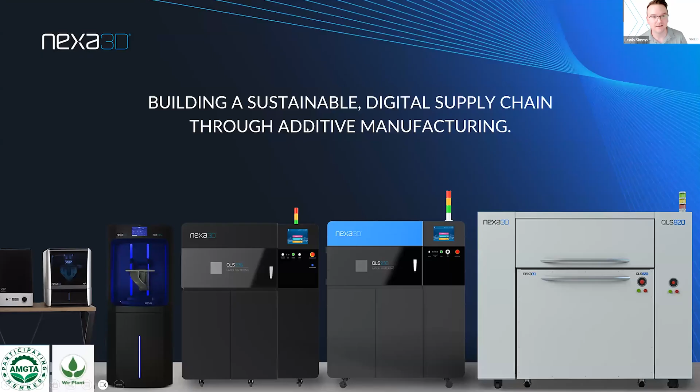But what brings us to work every day, and certainly an exciting component of the TPC conversation today, is building a sustainable digital supply chain through additive manufacturing. It's something that we're all passionate about here at Nexa, and it's something that we keep in mind as we look at both material validations as well as our technology and what we can do with it.

So I will be finishing up my portion of the speaking today. I want to quickly introduce our speakers. We have John Calhoun, who's our director of QLS Business. John has been in the industry for a number of years and brings a lot of expertise regarding powder bed fusion technologies, and certainly on the material side - that's where a lot of my experience comes in as well. And I don't think we have been more excited about an elastomeric material, John, until we found TPC.

So you'll see, hopefully our enthusiasm is conveyed throughout the presentation today. And joining us as well is Dwayne from La La Land Design and Production House. Dwayne comes to us with a ton of experience in leveraging design for the footwear industry, as well as some other products. He has had hands-on experience with TPC. He's been in the mud with us, really learning how to leverage this material to the best of its ability, and really shaping that conversation I talked about a moment ago, which was how can you leverage design to affect the performance of this material?

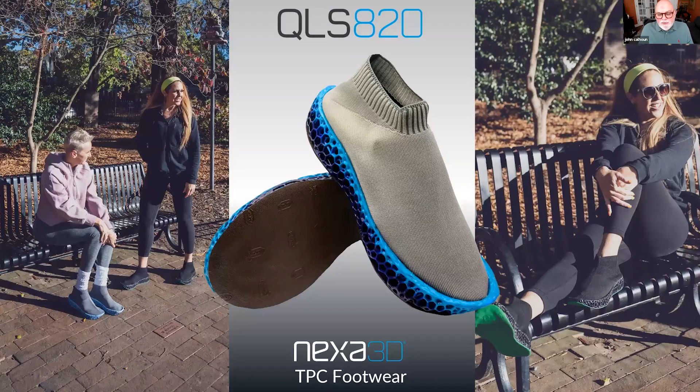So here today, we're going to focus primarily on TPC for the footwear industry. However, this material is so robust and so unique that there are many different industries that can utilize a robust elastomeric material with these type of mechanical properties, which we just haven't seen in the industry.

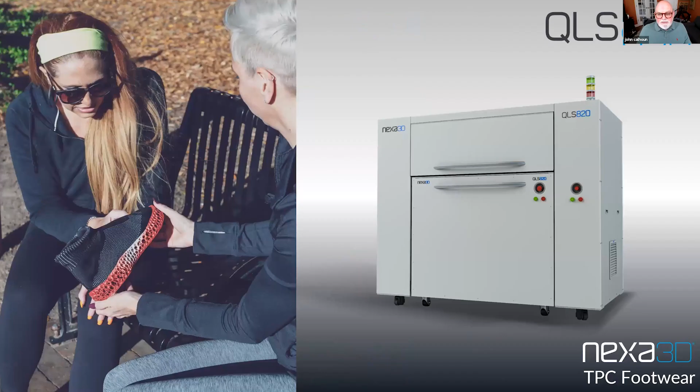Nexa 3D offers a high build volume, high speed SLS printer, the QLS 820, for the production side of this. We also offer the smaller QLS 230 and 260 for doing smaller pieces, maybe something smaller than midsoles or other sportswear parts.

One thing I want to focus on here is there's a lot made of Shore A durometers of materials, and I think it's important to understand a change happening in the industry as people start to understand how meshing your geometry can affect the net shore rating of a material.

While TPC has a Shore A of 95, it's so durable it will allow you to generate a mesh like I have on screen here with a 1 millimeter strut diameter that gives you a net shore rating in the 40s.

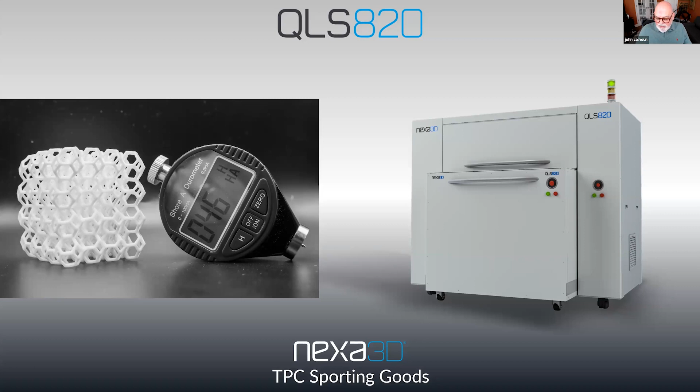So these things kind of work hand in hand. If you want a soft, pliable, low shore material via mesh, it also has to have the resiliency, the toughness, and the rebound to stay together and stay in one piece as you flex that mesh to give you the low shore rating. And TPC certainly excels at that.

And that can be seen in footwear, orthotics, prosthesis, and other applications as well. But today, again, we'll focus on TPC and sporting goods.

Those of you lucky enough to join us at FormNext got a chance to see these shoes that we made in conjunction with our partners, which we'll talk about later in this presentation. This was just an idea we had at Nexa to put together a great example for TPC, and we were able to complete this entire project and make about 10 sets of shoes in under 3 weeks.

I think that's absolutely unprecedented, certainly if you think about what goes into making footwear with traditional manufacturing, molding of EVA foams and things like that. But if you just think about shoes, there's tons of components that go into shoes, and many of these would be excellent applications for TPC based on its durability, its low cost of manufacturing, and customization across many sizes.

The thing that gets lost on people sometimes is you think about making shoes, well, it's not just making one style, it's making 22 sizes or more of a shoe in men's and women's, and then all of these internal components. That's a lot of tooling required to make a line of shoes.

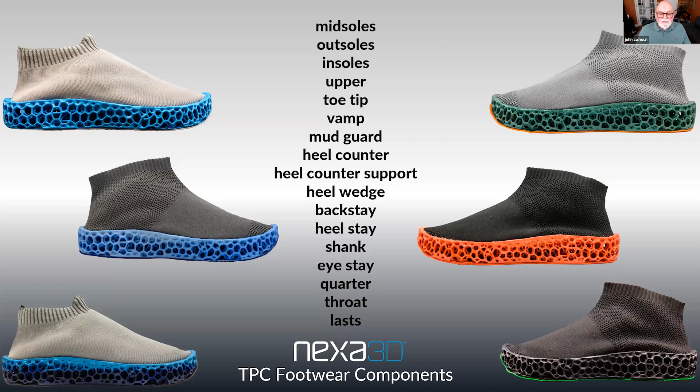What we're bringing to the industry with materials like TPC is now the ability to do customized pieces and customized shoes on demand, which is really unprecedented. That really just comes down to having the right elastomeric material with the right durability, the right softness, the right capability on the print side that would allow you to get into colors and dyeing and all of these things we'll talk about today.

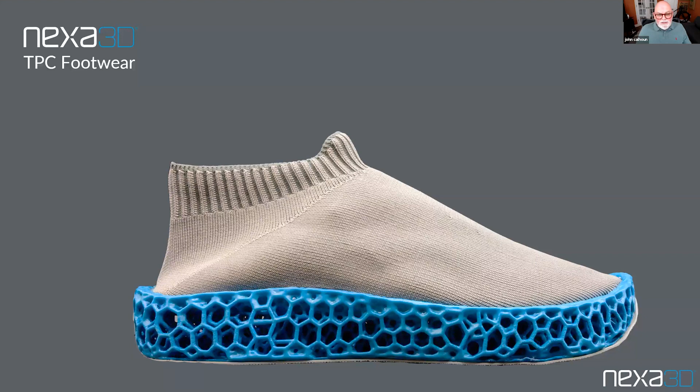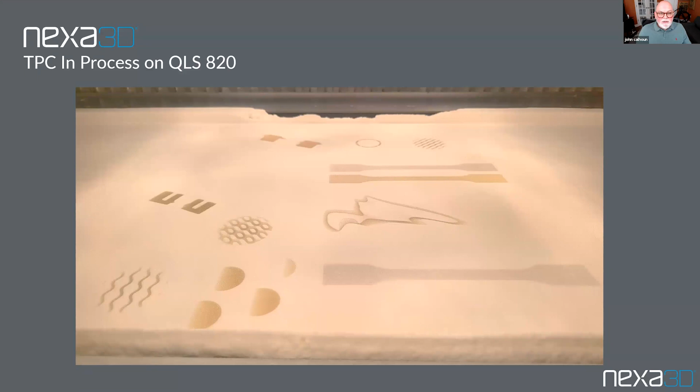So again, you can see the piece of the midsole we produced with TPC for FormNext. What you can see on the slide now is the actual 820 running a whole range of parts in TPC. You'll notice this material is white. When the parts are finished, they are bright white, and that allows us to dye the parts any color.

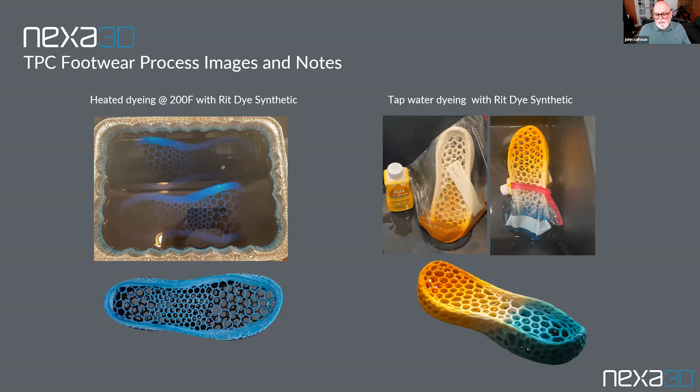So you can go as far as you want with automation, which we'll talk about, or you can do it as minimal as your budget will allow.

At the production stage, clearly the 820 with its 4 laser system and the ability to turn over its build volume multiple times in a 24-hour period lends itself to automated production. The post-pro DP will allow for automated depowdering, and then of course the post-pro SF100 will allow for vapor smoothing of these parts.

If that's your intended desire for the finished goods of a vapor smooth part, you can certainly do it. One interesting thing is that with TPC, when you get into fine strut diameters and things that need to flex and rebound, vapor smoothing can actually help the durability of these parts by smoothing out surface imperfections that could be the start of a surface crack or lead to failure. So combining TPC, a highly durable material, with vapor smoothing refines it even further, giving you a product with great durability, great longevity, and an incredibly smooth surface finish that feels good in contact with skin in prosthesis applications.

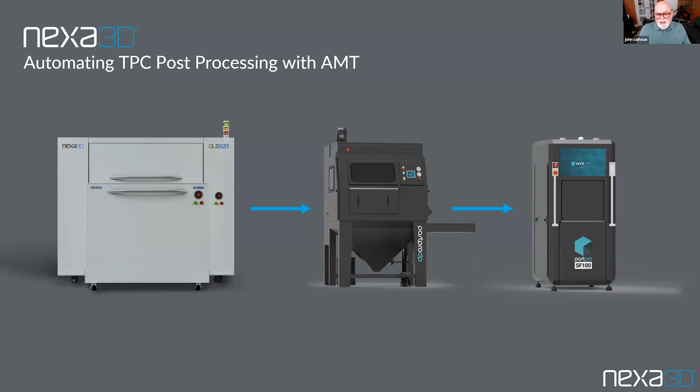It's a fantastic application. So just a couple of notes from our project: we did a super light midsole that only weighed 145 grams. If you compare that to a resin-based midsole from Carbon, their midsole weighed 350 grams. So from a competitive standpoint, it's amazing that we're less than half the weight of Carbon, which also translates to less than half the cost for production.

There are also much easier things on the finishing side which aren't as obvious. For instance, you can use automated depowdering with our systems and recover all that powder. With resin-based systems, that middle step of cleaning resin off your parts is painful at times, wasteful, and generates hazardous waste. When you get into fine meshing, the complexity of cleaning really rises. Not so with powder-based parts—with automated cleaning, you can simply drop it in, and it cleans all the powder out, allowing you to recycle.

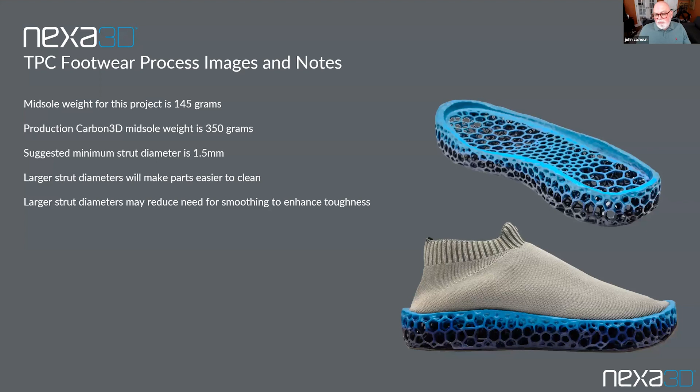For instance, if we were doing this midsole with a resin-based solution, it gets really complicated—you can't just dip the part in IPA. You'd basically need a centrifuge to sling that thicker, higher viscosity material out of the part. So it becomes really complex trying to clean intricate meshes with resin-based systems. We don't have that problem with SLS—this is a huge advantage of powder-based technologies.

So again, to highlight this project, we combined 5 companies' efforts to create an unprecedented number of shoes in such a short time. In 3 weeks, we combined the design work from La La Land production for the midsole design. The upper was 3D woven by a company in California called Variant 3D, which can quickly program a weaving machine to weave a 3D upper. And partnering with Evonik for the TPC material and AMT for vapor smoothing, it was great seeing everybody working together to make this happen. For such a condensed timeline, the success was quite good to get everything ready and delivered to Formnext in just 3 weeks.

So with that, I want to turn this over to Dwayne. Dwayne is a real footwear expert, unlike myself who doesn't know much about shoes, but I've learned a lot from Dwayne and the guys at La La Land. I remember when I walked into their building and showed them TPC, there was a lot of buzz and excitement right away, and they've done amazing things—they continue to innovate with TPC. So let me turn it over to Dwayne, who can give you some words from the expert view of how to use this material in footwear.

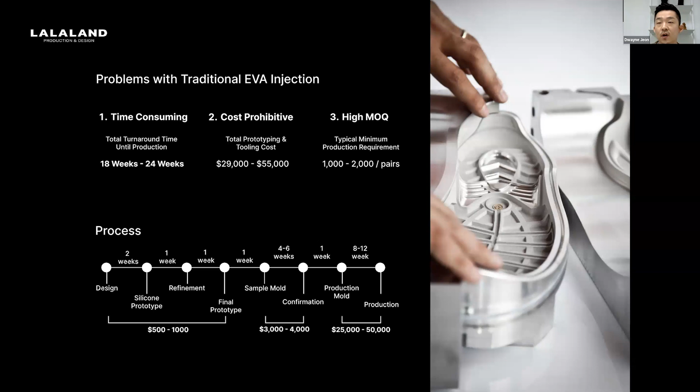So for that reason, the footwear business in general is very high cost and prohibitive for anyone new joining in. And that's one of the reasons stopping many people from going into manufacturing and starting a shoe brand.

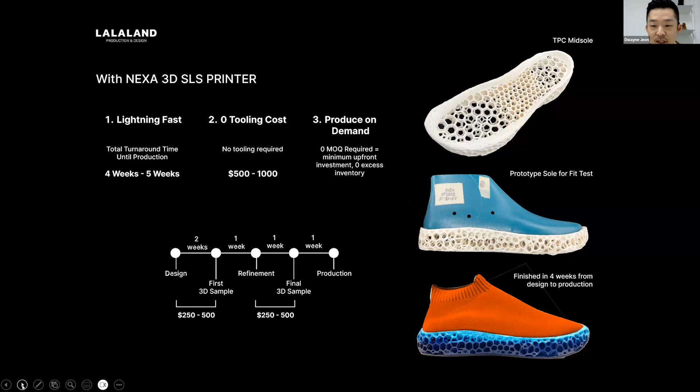So just to go a little deeper into the specific advantage we saw with TPC is the ability to produce multiple concepts at once. You might say that's possible with different 3D printers, but really Nexa's advantage that we saw was the speed - again this also took almost less than 3 hours to print.

So within that 3 weeks, we were able to do, as you see in the slide, 5 different concepts, whereas with injection molding, that's going to take 5 separate molds and 5 separate costs just to get those samples.

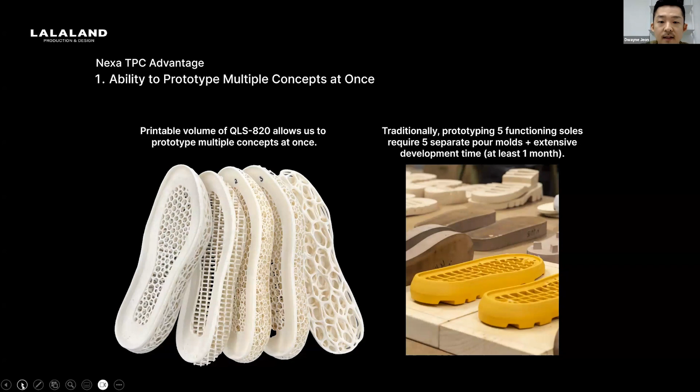Another great thing about TPC is the ability to control the performance. If you look at any traditional compound like EVA or PU, in terms of performance it's very static, and there's not much you can do to manipulate how it behaves.

If you look at any runner shoes in your closet, and if you wore them more than, let's say, 6 months or a year, you see them decompress and completely deform from the original form. So these traditional compounds don't even retain the performance so well. But with TPC, what's possible is you can manipulate the lattice structure to fit a specific purpose.

So let's say I'm designing a helmet for cycling. I can design a specific lattice to be shock resistant, or in the case of midsoles, it's very important to have the bounce element to give comfortable support and cushioning. By creating different sizes of lattice, even though it's the same design, all of them bounce differently and energy return is different. So it's really detailed how you design this lattice structure and make components that were purely impossible before.

Traditionally this was done through a combination of different materials. For example, in the case of shock resistance, it would be a combination of maybe EVA with extra TPU components or carbon fiber components, which has more cost and more time to execute. And imagine like airbags from Nike — we can create a lattice that behaves like an airbag, so it becomes part of the component of a midsole. There are so many avenues you can take to make this material very performance-focused in a way that wasn't possible before.

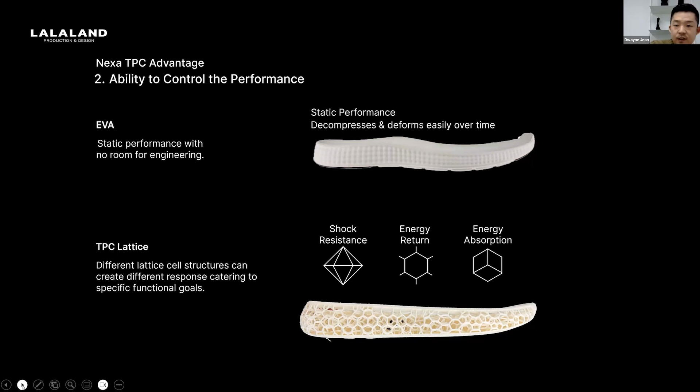Next slide, please. And again, I emphasize the speed of the Nexa. One thing that was prohibiting us from getting into 3D is the fact that we could not mass produce with other machines.

We don't do just concept and R&D in this company, we manufacture the footwear. And I think that's where you see so many cool concepts on Instagram, on the internet, designers making 3D prototypes, but you never see them going to market because it's purely not mass producible. But with Nexa's TPC and the QLS printing speed, based on the spec we're told we can make 10 pairs of this every day, which is incredible.

Again, this with resin took 26 hours, let alone just the cleaning process and everything. This one didn't even finish all the way, so I had to do kind of a Mickey Mouse repair where I slice this off and just print the toe and connect them. So with a resin printer, there's so many chances of failure, and the cleaning process is a nightmare.

Going back to bringing manufacturing back to the United States, the benefit of additive manufacturing is eliminating the high labor cost in the parts that's not necessary. But unfortunately, with resin printing, because there's so much cleaning process involved, it becomes labor intensive, which kind of diminishes the whole benefit of additive manufacturing.

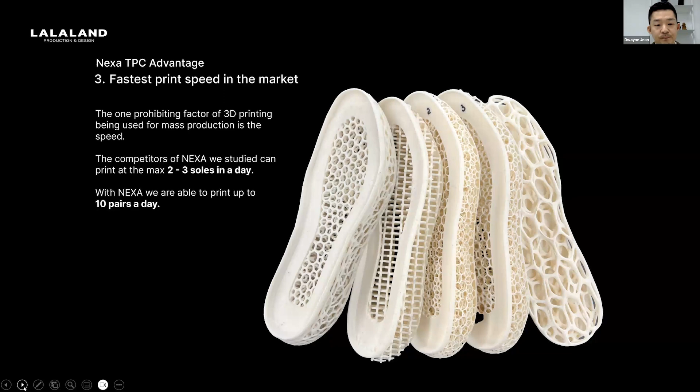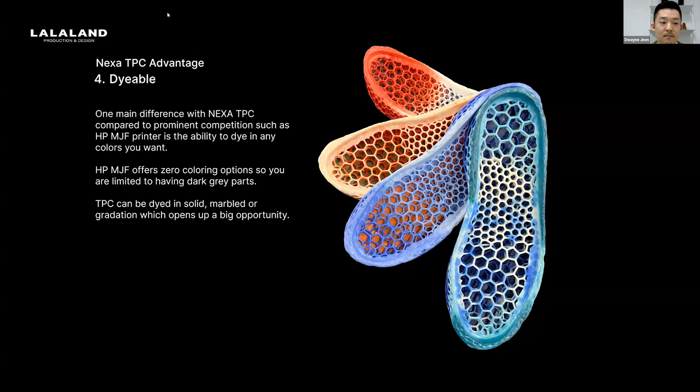As a conclusion, we're very excited about where TPC combined with the footwear industry is heading. There are many things that weren't possible with other printers, so from our end, we're very excited to keep pushing these concepts and hopefully show a very interesting concept shoe in the market next year.

Yeah, great. Thank you, Dwayne.

I think one of the things I wanted to highlight is the difference between TPC and the TPUs, TPAs, or TPEs you see in the market — this material has 400% better toughness than those materials, and that's where you're going to really find a crucial performance advantage when you start meshing, when you need to flex. If the material just can't handle that, it's not going to work.

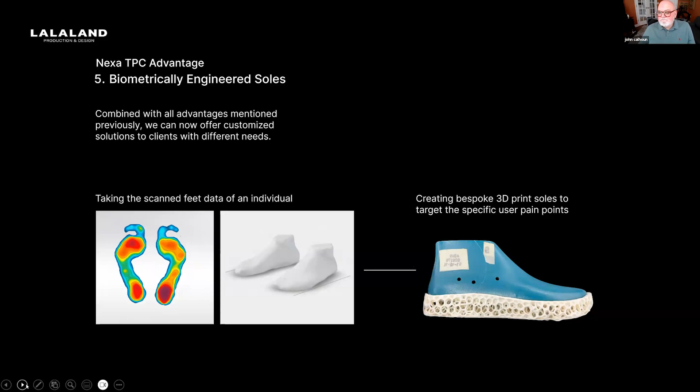So with that, let's go ahead, Dwayne. Just adding to that, we actually had a client who printed about 1,000 insoles with TPU material.

Unfortunately, they were all discarded because they didn't test it until production. We bent it a little bit and it just ripped apart. So that's a huge leap forward in the capability of elastomers, to have an elastomer with such great durability.

One of the things I'd point to in the orthotic and prosthetic industry is with this material, you can make things down to 1 millimeter or even under 1 millimeter thickness that have incredible tear strength and mechanical toughness. You just wouldn't find that with TPUs, in their tear strength and durability. It just isn't there.